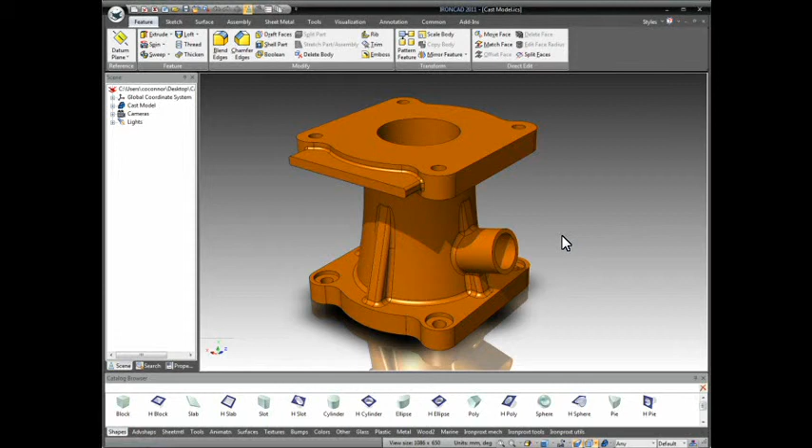This demonstration shows how part design using innovative part design can be done to create this simple cast part. This isn't really about showing that we can build the model, but showing how we build it differently. It's not overly complex, but it does have some lofted features and some strange positioning for inlets on the side, plus features on the side of a curvature part.

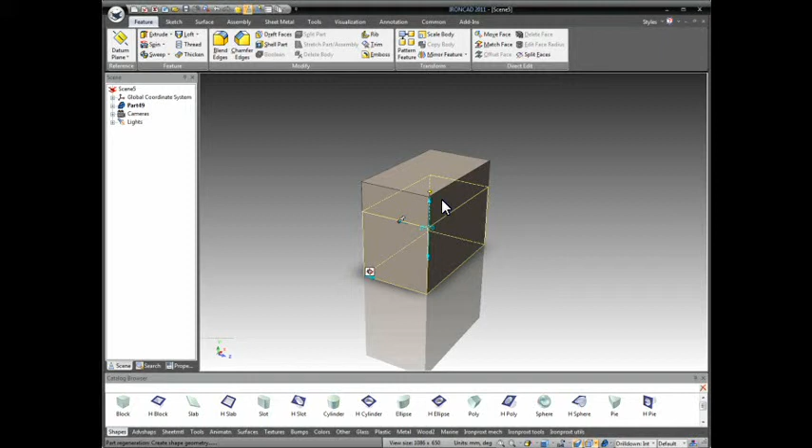So we'll go ahead through this demonstration to show how we can build this in innovative design. We'll start by building a new scene, starting with simple dragging and dropping of a block feature. As always, we can use our handles to adjust the size, but we can also go into here and adjust multiple values at once.

For example, we want to set this to an exact size, so we can adjust our value. We can continue to add features onto our geometry, and notice when we zoom out, it shows a bigger part. If we zoom into our model a little closer, it automatically scales our part to fit our viewing scene, which makes it easier to work with this size of geometry.

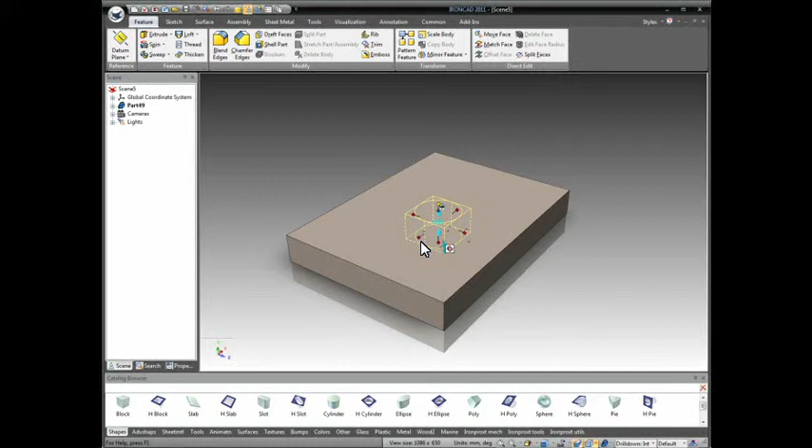We're just going to use our Smart Snap technology to snap this cylinder to give us our base platform shape, and we'll continue to drop some features out here. One of the key things we want to do is place this component over this area, tangent to this front edge and aligned with that other edge, right here.

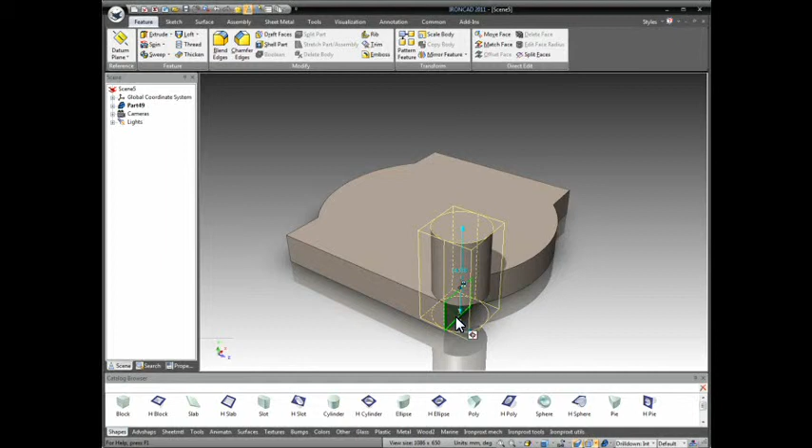In IronCAD we can hold down the Shift key and get Smart Snap feedback to give us that precise alignment we're looking for, and we can use our handles again to quickly size this down to fit exactly where we wish.

Next, we can add a counter bore using our custom hole. We can type in our values inside here, or set up predefined values for our features. In this case, I built a custom counter bore with the exact size, and we can just drag and drop that out.

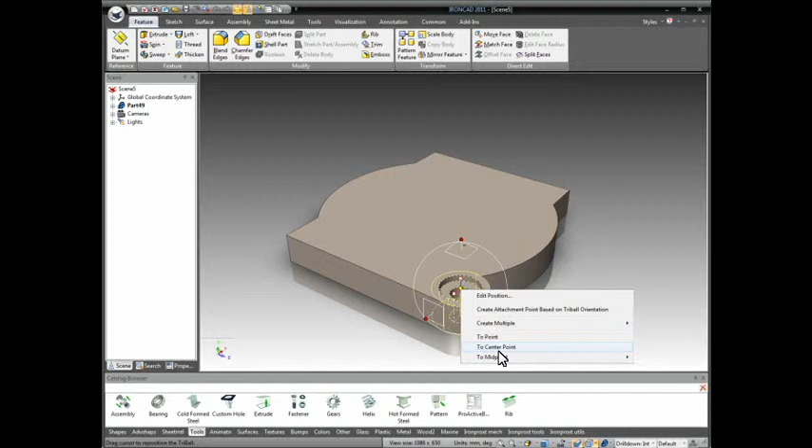Now we need to replicate this on all four corners, and we can do that using the triball. We'll position it to the center point of our circle and mirror it to the other side, then multi-select all these objects, holding Shift to grab the other one we just created, and mirror it to the opposite side.

We essentially now have our base feature. In our part, as you can see, the bottom and top are inversed, so what we want to do is select all these — using our selection filter to grab our IntelliShapes — and quickly box select all the IntelliShape features.

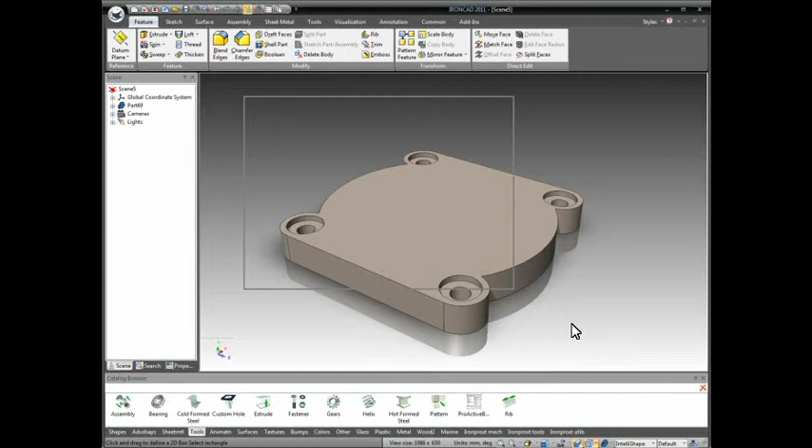Again we use the triball, positioning it at our reference point, the bottom face. We need to know the midpoint of our geometry, so we'll edit this distance — we know it's basically 20 units high — and then we can turn our triball on and mirror it.

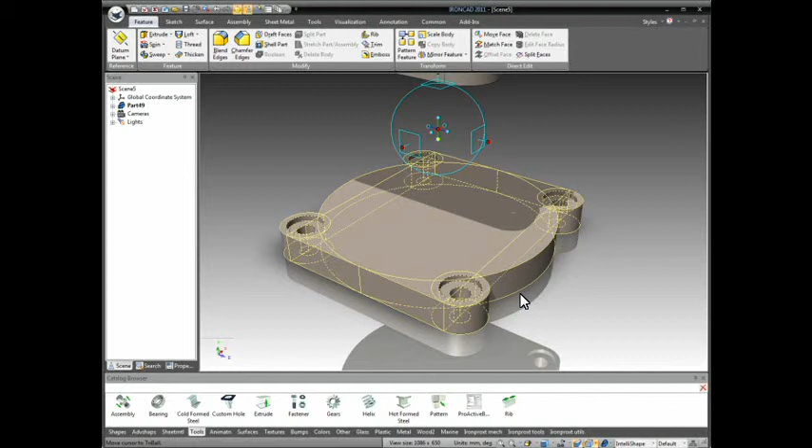The key thing to remember is that in traditional CAD systems, to do that mirror they'd have to create datum planes, offset it from the bottom surface, and then mirror that plane. In IronCAD we can just use the same tool we've always been using, the triball, to achieve our results.

Next, we want to create our loft section that's inside here, so we'll turn on our loft command. We can use a regular loft or a loft wizard — in our case we'll use the loft wizard. We pick our starting point, and we want it to be added material.

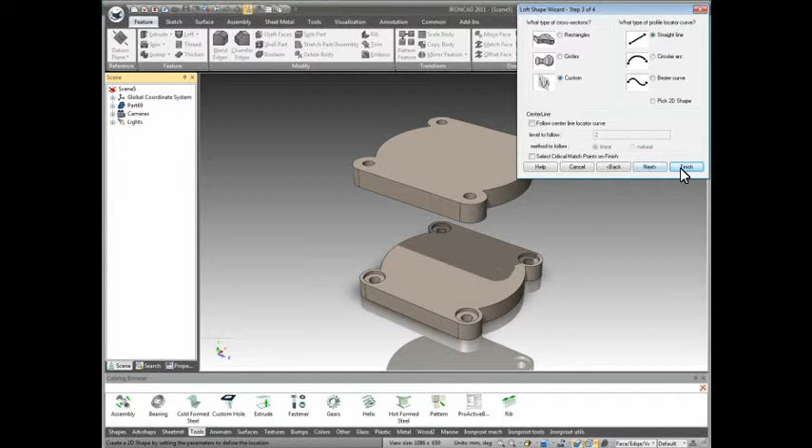We'll use four profiles, and we can use custom profiles or predefined ones. We'll use custom in this case and just finish our sketch. Options in IronCAD automatically align our grids to make it easier for us, and we can drag our line down and snap to the geometry precisely to the top, where we want our profiles located between this length of our curve.

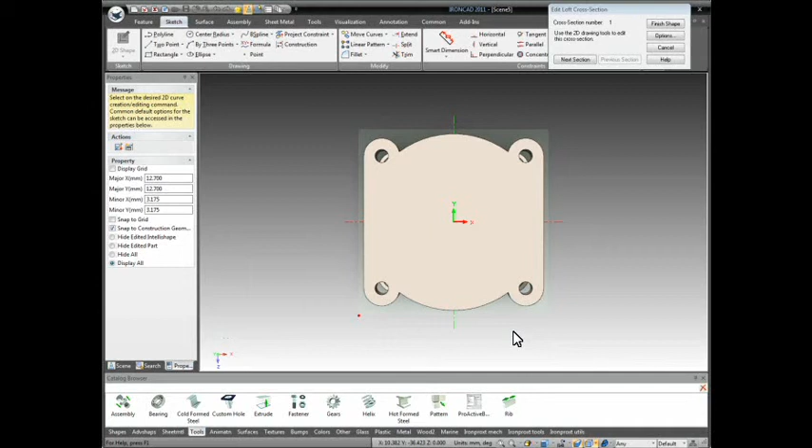Now we notice this automatically aligned. If we hit finish, it also aligns our profiles. We can disable that if we wish by going into our options and turning that capability off, and then the next time we enter this command, the next sketch created won't realign for us.

Now we just want to create our geometry, and notice I'm using these hotkeys to access all the creation types — in our case we're creating a circle. We can place the circle in the center, hit our tab key and type in our value, quickly finish our sketch, go to our next profile, and repeat the command.

Essentially just place our center point, tab and type in our value, and finish off our sketch.

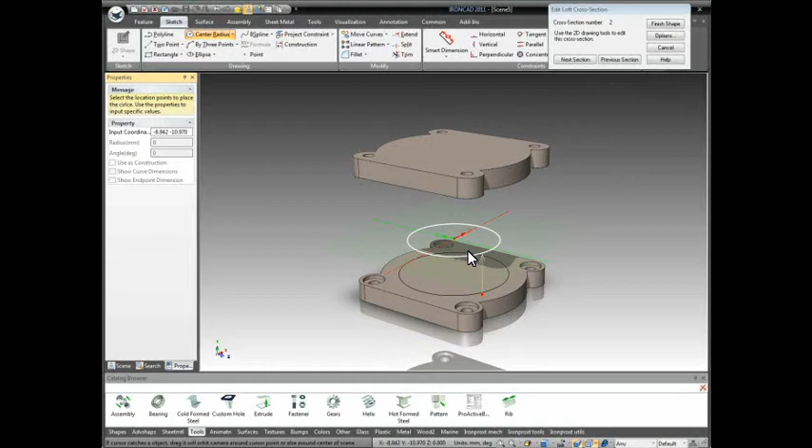One thing that's kind of unique about IronCAD's lofting is these profiles can be dynamically changed, where we can use the triball to adjust this up a little bit higher, since we want this transition to be a bit higher from the 15 to the 12.5. Then on our next section, we bring that up a bit more to make a nice smooth transition. In this case, this one's going to be at 12.375.

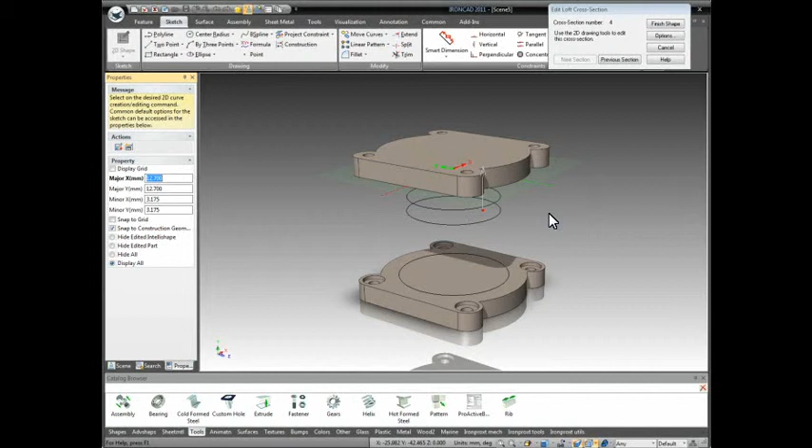We're going to repeat this, so we'll copy that, and adjust it just a bit more to give some smooth continuous space between there. Then in our last profile, we just paste it, and it's already in the location we want. We finish our sketch, our loft, and finish our shape.

As you can see, the next thing we do is create our ribs inside of here, achieved simply by adding another feature. We can do this in multiple ways, but we'll just do it by adding a feature.

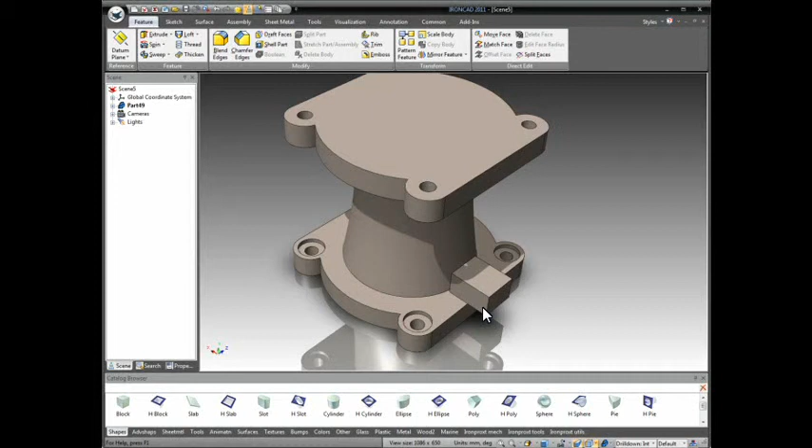That can be resized inside of here to whatever value we wish. If you're zoomed in, zoom back out again to make it a bit bigger so we don't have to resize it too much. Just drop it here, make it a bit bigger.

If we want to resize, some of the other things you can do in IronCAD is control-select these handles, and if you control while you drag, you can see snap increments occurring. We want that to be a unit of 4, so we can drag to an exact precise value, and also snap to an exact value.

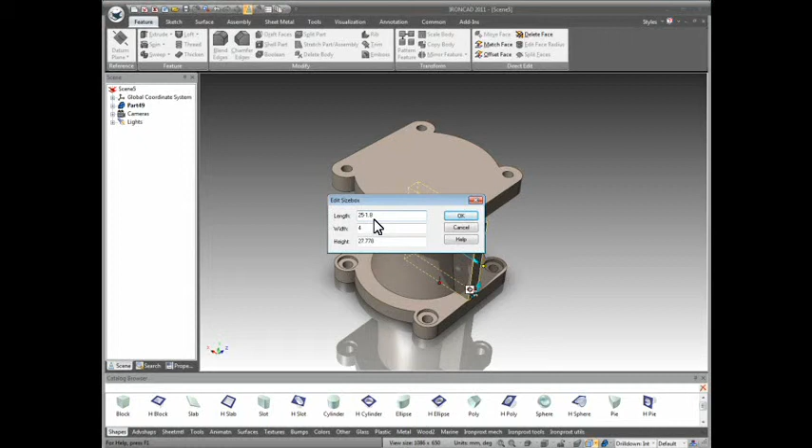The nice thing about the handles is we can set distances. So if we want to offset this face, we just take the current value and offset it whatever value we want, which is 1.8. We can offset that from the current location it's sitting at.

The last thing we want to do is give this a nice taper. We can use the taper command, or continue to use our triball. The nice thing about the triball is you can position it anywhere you want, for example, rotating about this edge, not where it was dropped from.

We just move it to that location, rotate it 15 degrees, and you'll see when I finish this, our shadow plane has moved down because our part is pushing through. We just pull our handle back, and you'll see that snap back up to our bottom face.

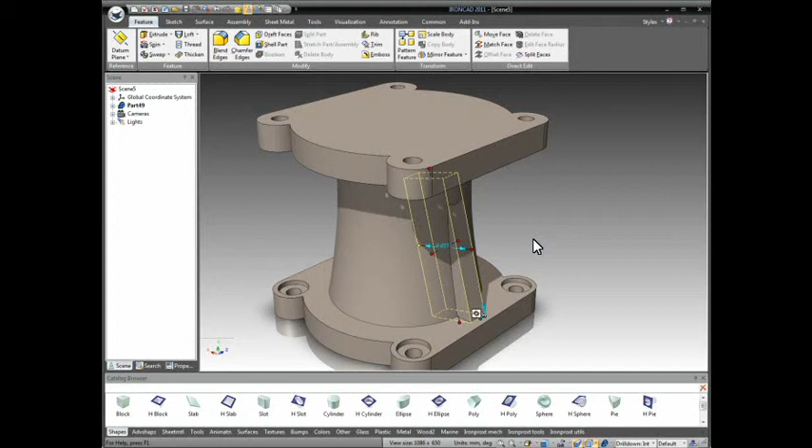Now we continue to use the triball if we wanted to make a linked pattern inside of here, or you can just use the pattern command to achieve the same results. In this case, we want to do a circular pattern. This is our axis, and we select our feature, and just hit OK to apply that, or type in different values if you want more or less features inside there.

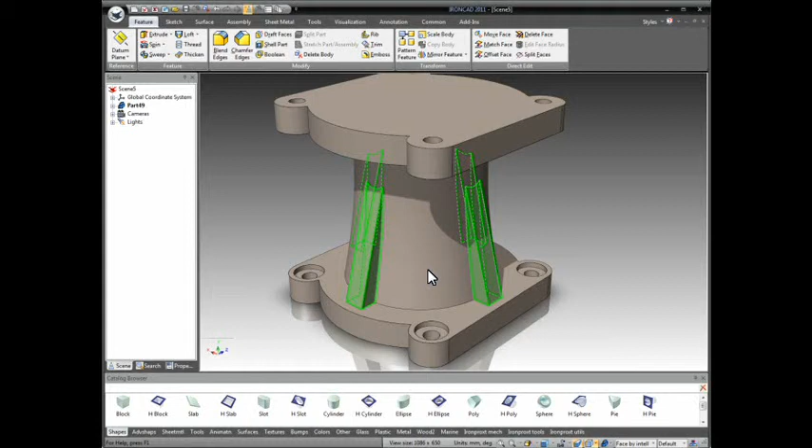The next thing we want to do is add our blend features to this. Again, we can go to our selection filter and say we want to select all the faces by IntelliShape. Notice when we select our one rib, it selected the other ones because it's part of a pattern. We can also select our lofted feature to grab all that and essentially enter our blend command inside of here.

Next we type in the value we want to use. In our case, we're going to use 1 for our default inside of here. You can use the selection filter to change any individual ones, or just pick individual edges and it'll highlight for you. Say we want to make that a different value, we can apply that and apply our blend to our shape. Very quick and easy to do this model so far.

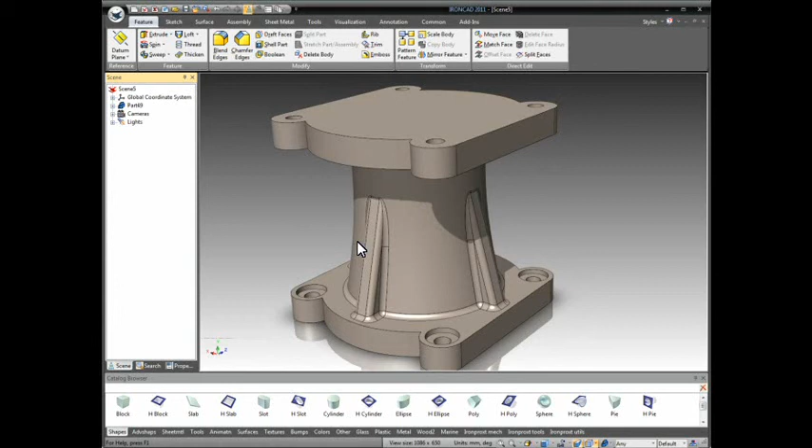Next, we want to add our feature that comes off of here, and this is a really key thing in IronCAD. To create these shapes, this is very handy because we can snap to midpoints of a geometry, and reference that geometry and position it where we need. For example, we know that this feature is basically from the midpoint of our rib and needs to be moved down 1 millimeter. So we can actually place it on the midpoint, move it down 1 millimeter.

If you think of traditional CAD, how they would have to achieve that is creating these datum planes on that face, creating an intersection datum plane, offsetting that datum plane, just to create a sketch plane for this feature. For us, we can do it in a very few simple clicks.

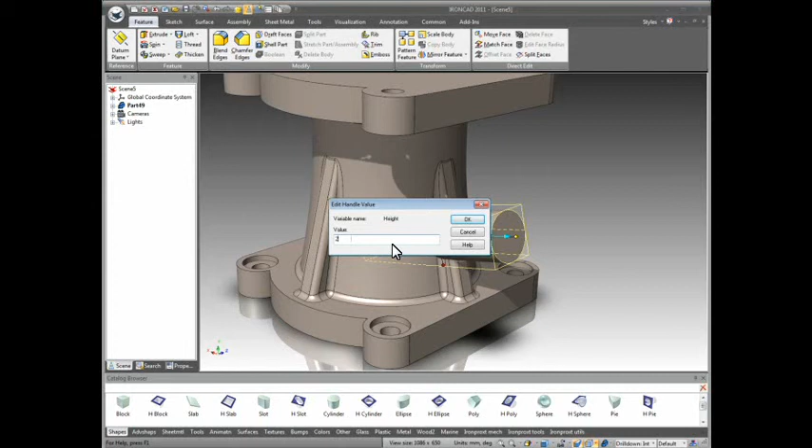We can also snap this to the center so that we know this total length has a specific unit from the center point or axis point of the geometry, which is 24 units. We can define that easily using the handles and snapping to these intersection points.

Our IntelliShapes actually contain intelligent information as well. If you go to surface smoothing, for example, maybe we want to add a blend to all intersection edges. We can type in a value and automatically apply that without having to pick all those edges around the geometry. So very simply, we created our shape in position and added the blends at the intersections.

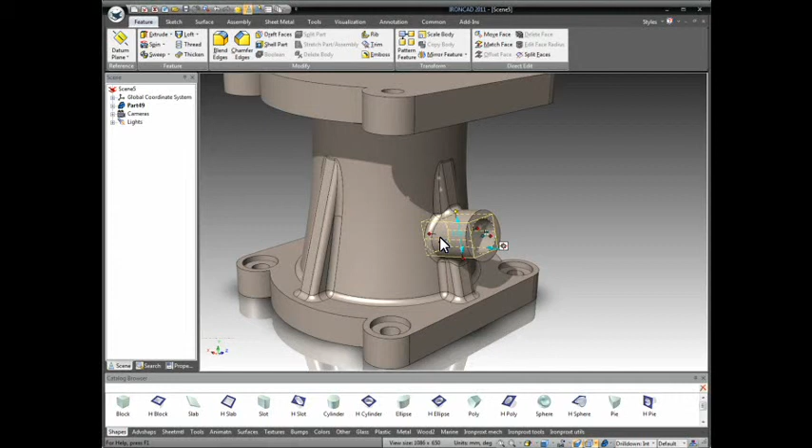Let's go ahead and make this a bit smaller inside here and drag it in. We'll get our inlet created.

Next, we want to add some blends to our corners here. One way to do this is to turn on all the edges on the part by selecting it, so we can see all the hidden edges inside. This makes it easier for us to select these edges without having to continuously rotate the model when we enter the blend command. So we just add the blend command, and now we can pick all our edges through the part without having to rotate around.

To get all the various edges inside there, give them a value that we wish, and hit OK to apply that to get our geometry. Once we're done, just turn our edges back off, and now we have our blended model.

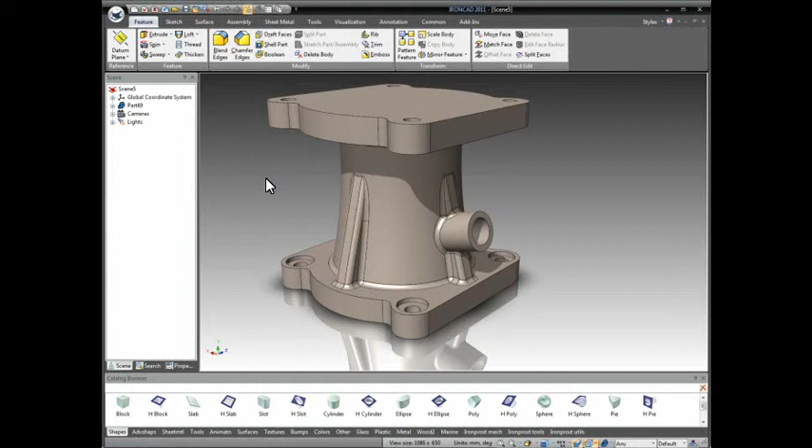Now our last piece is to add our extruded feature off the side here. One way to do this is drag and drop another feature, size it, rotate it around, and extrude it to the face. But let's show how traditionally we can do this using commands like an extrude command.

We select on our part and create a sketch plane. In this case, we'll create it normal to our face and pick our center point to get our basic definition, then place that. Again, our sketch plane can be changed using the triball.

In our case we have a specific dimension that needs to be created, 24 units off from our center point, and we want to position it right on the midpoint of existing edges. We can select these midpoints, and you can see the snap highlights appear so we're precisely in the middle of our geometry.

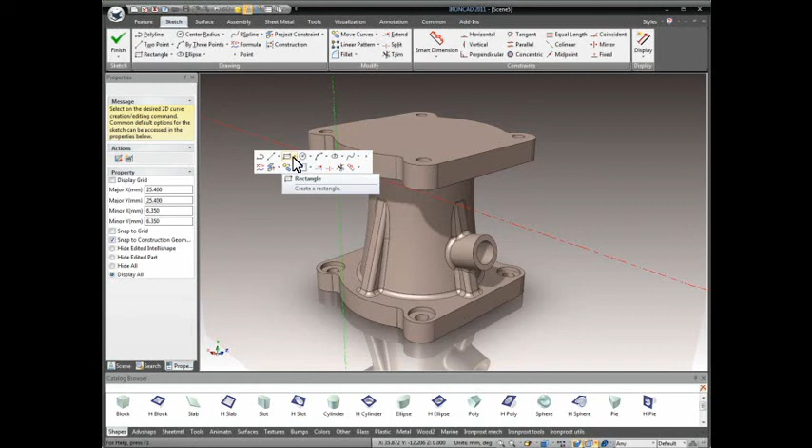Once we're done with the triball, we turn that off and begin our sketching, using our hotkeys to grab our center rectangle. In this case we snap to our center point and size it out here, using the tab to set in exact values to place that.

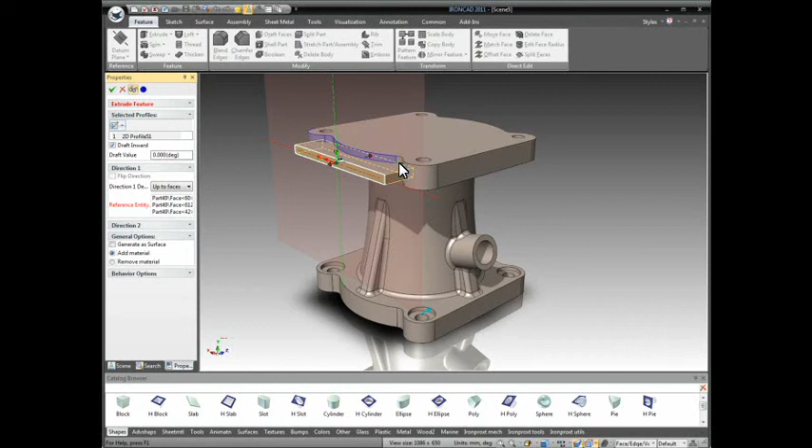Once we hit finish, it returns us to our extrusion command, and we can say we want to extrude it up to faces. We simply select the faces we want to extrude up to, because otherwise the width of our extrusion will cut into our holes, which I'll show you in a second.

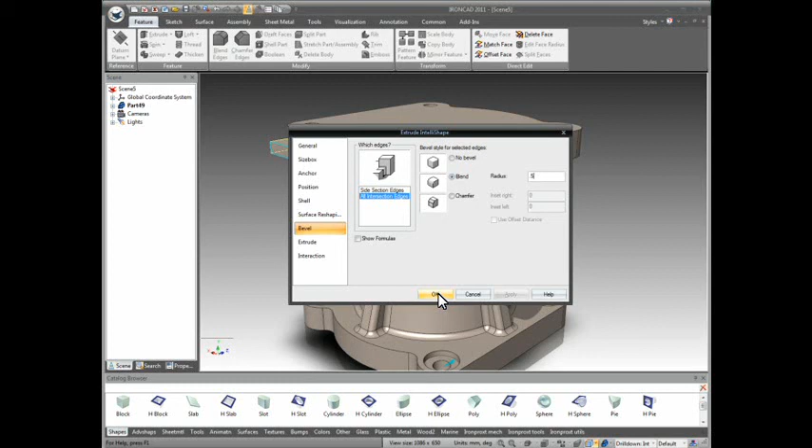Once we do extrude to face, we can see it trims off these faces so it doesn't intersect into our holes. Again, we can go into our feature surface reshaping properties and add bevels to this. For example, we want to add a 0.5 to our side faces, and a 0.5 to all the intersecting edges to finish up our shape on that side.

Last but not least, let's go ahead and add our through hole on our part. This is not a shell, this is actually just a through hole that goes through here. Again, you can dynamically size those, or double click to enter exact diameters to quickly apply the values you wish to your geometry.

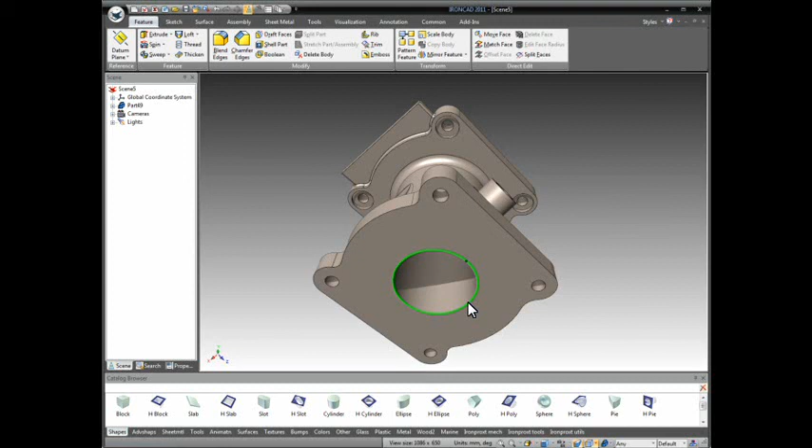Last, we want to create a counterbore at the bottom. We simply hold the shift key down and snap directly into the center. Again, we can edit the size box if we want to edit multiple values at once. This is going to be a counterbore, a bit bigger, and a cut. If we want to finish off our geometry, we can just give it a nice smart paint color to finish it off in our design.

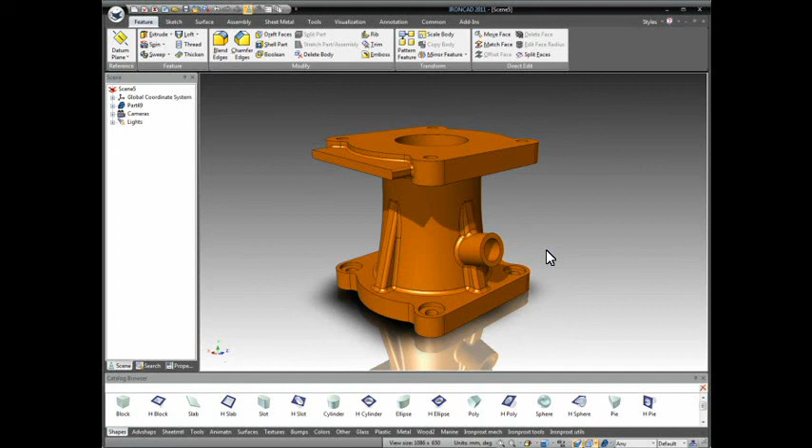So hopefully this gives you an idea of how you can build this geometry a bit differently from the traditional ways you would build it using a normal history-based modeler out there that uses sketch planes and datum planes to create this geometry. But in IronCAD, we can use innovative design to quickly design these one-off type cast models. This is a good example.